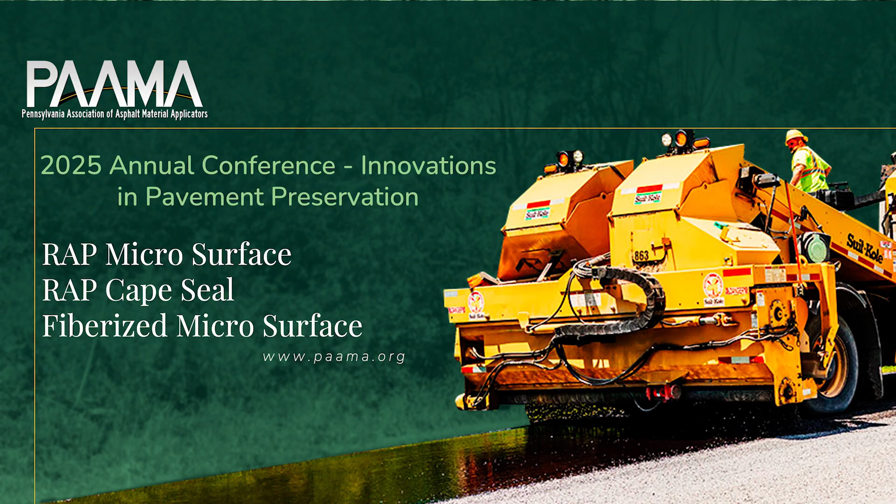I'd like to thank everybody for giving me the opportunity to come in and talk about some pavement preservation, RAP microsurfacing, and Cape Seals. I do think this is new to the industry, and I think we need to start looking at sustainability and ways that we can utilize RAP in pavement preservation, stretching those limits with RAP.

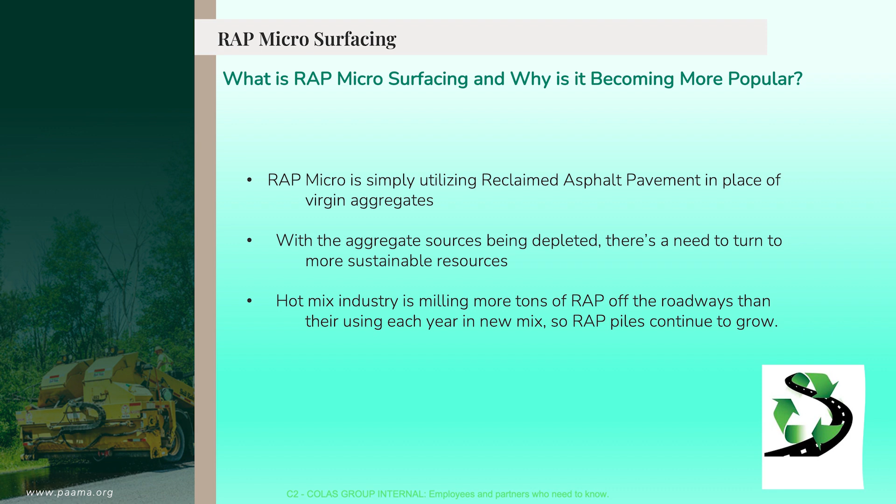So what is RAP microsurfacing and why is it becoming more popular? It's utilizing reclaimed asphalt pavement in our microsurfacing over virgin aggregates. Over time our virgin aggregate sources are going to start being depleted. But what's happening with our RAP piles throughout our states? Every state, the RAP piles are growing and growing. So let's start looking at how we can use this RAP in our pavement preservation techniques.

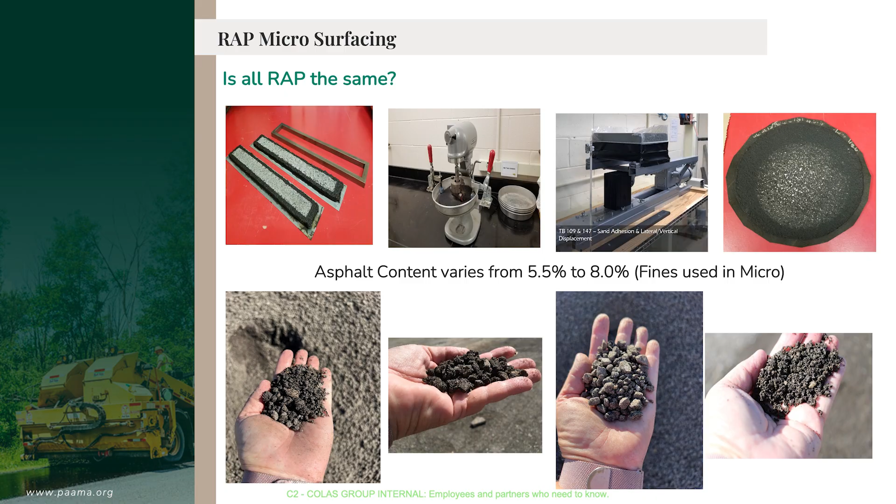So is all RAP the same? Raise your hand if you think all RAP is the same. RAP is just like mix designs, right? We have different gradations, different high quality and low quality aggregates within our mixed designs. That's the same way with all the RAP. But we're not doing RAP management at this point, so we have to be careful. We need to look at all the different sources we've got, and we have to treat them basically as a low quality aggregate right now.

We also know that it can vary anywhere - the fines are going to have the higher AC content, while the larger particles that you use for chip seals are going to have the lower AC content within those piles. You can also check your RAP to make sure if it's polish resistant aggregate.

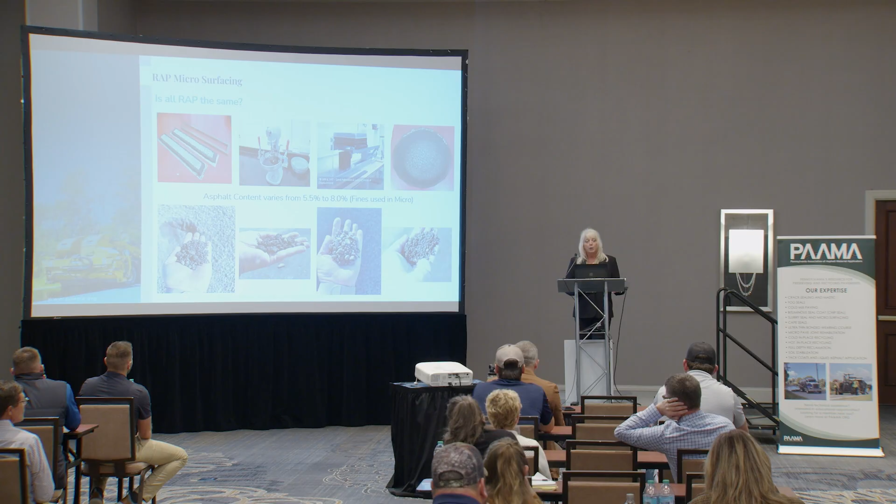I'm going to get into some of the deep dive that I was doing when I was with KYTC. I'll go back and forth because I worked directly with Strauser Construction when I worked with the Kentucky Department of Transportation. They did a lot of the research with us when we were working on our RAP projects.

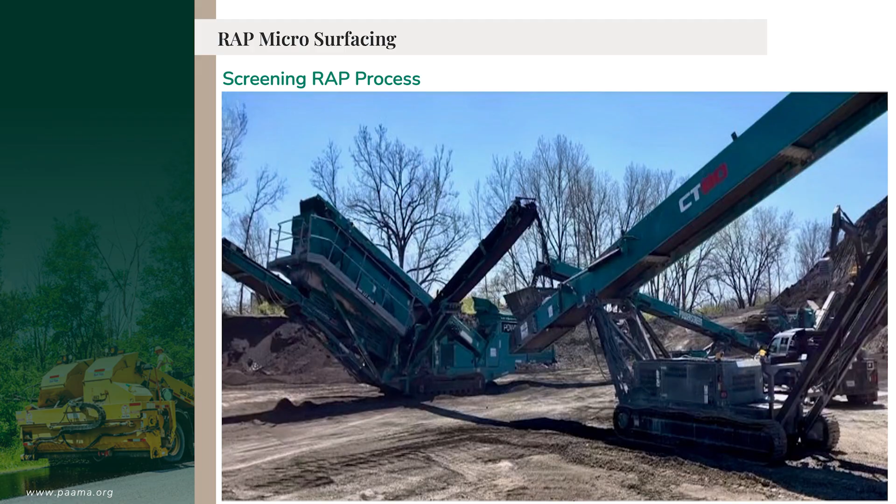So how do we process RAP? There are two different ways you can do it. You can start out with screening RAP only, just doing a straight screening. You're going to process more, but you're going to have more oversized aggregates. You're going to have waste of anywhere between 10 to 15%, maybe even more, depending if you've got saw cut type, like base failure, blowout type material in your RAP piles. So just doing the screening is going to give you your chip seal aggregate and then your fines.

And then your oversize is going to be kicked off. You're going to process more, but at the end you're going to have less material to work with because it's kicking your oversize off. So you can also go to crushing and screening that material.

So when you're crushing and screening, what's happening is you're screening it first. All that oversize is going into the crusher. So then it'll fall through the screens and the appropriate screens, and if it is still oversized, it'll go back to the crusher until you can utilize 100% of that material.

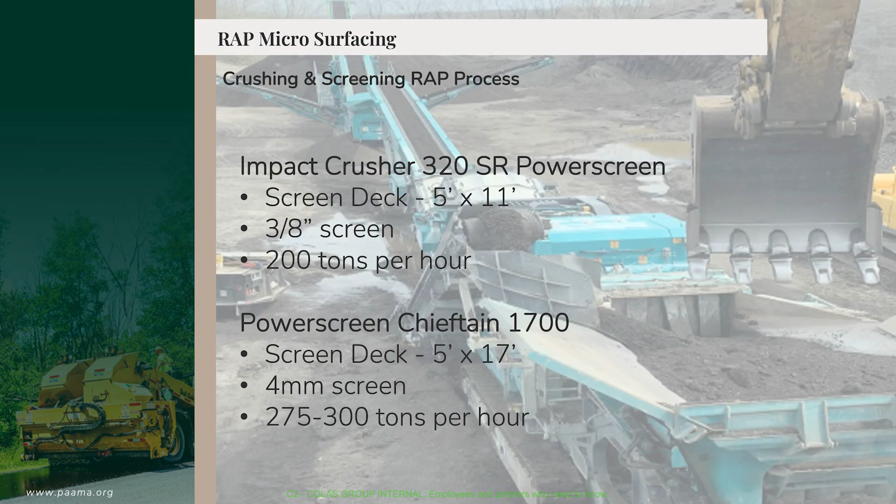So when you're utilizing 100% of that material, you're going to end up with about 60 to 65% being your fines, and 35 to 40% being your chip seal aggregate. So that just tells you what you're going to end up with.

This just shows you the different types of crushers you can use, and the screen sizes. This might be something you want to look at, because I'm going to tell you, when I was working with the DOT and we first started working with RAP, I thought, no problem, the processing is going to be 100% the easiest part.

Well, let me tell you, that was the hardest part, because we had a company come in that had actually been crushing rock. It's a totally different process, and I'll dive a little bit deeper into that about some collaboration and what we did.

So if you're an agency wanting to use RAP and having a company do it, make sure it's a company that knows how to process RAP, or you're going to face some really big challenges. I did so many gradations, it just wore me out. So that's something to be mindful of.

So this is kind of where we get into 100% RAP and the challenges that come with using 100% RAP versus blends. With 100% RAP, you're going to have some complications that come with that.

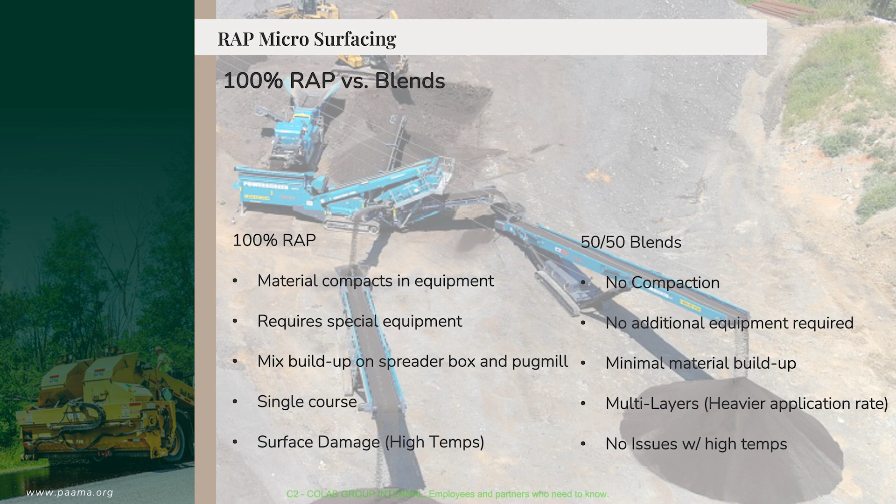Using 100% RAP, you're going to have material that wants to compact inside the beds of your trucks. So without making modifications to that equipment, you're going to need shakers or vibrators within those beds to make sure agglomeration doesn't happen, so you're able to get that material out into your microsurfacing machine.

It also can end up with buildup in the spreader box and the pug mill. You can get more drags and buildup on the rubbers more frequently, so it's going to require a little more maintenance. I think it becomes more challenging.

Once again, you have to be a little more careful for wheel rutting. If you've got wheel rutting, you can have problems with this material, ending up with more surface damage. I've seen projects that are 100% and maybe they're tender a little bit longer, because you're using 100%. With a 50-50 blend, you eliminate a lot of those problems.

So you'll use 50% of your RAP with 50% virgin aggregate. You get rid of the compaction problem. You don't need additional modifications to your equipment, because it will not agglomerate like it would if you were using 100% RAP. You minimize your material buildup.

You can use multiple layers. A lot of people doing 100% RAP are doing it in a single course with thinner lifts. So you can up your poundage, do it in multiple layers, and you don't have those high temperature issues when using this material.

So I really do like using the 50-50 blend, especially working in Kentucky trying to save dollars. There's some other stuff I'll get into, diving a little deeper into using RAP, the industry challenges that Kentucky faces. So I have to be very careful and vigilant about what I was doing.

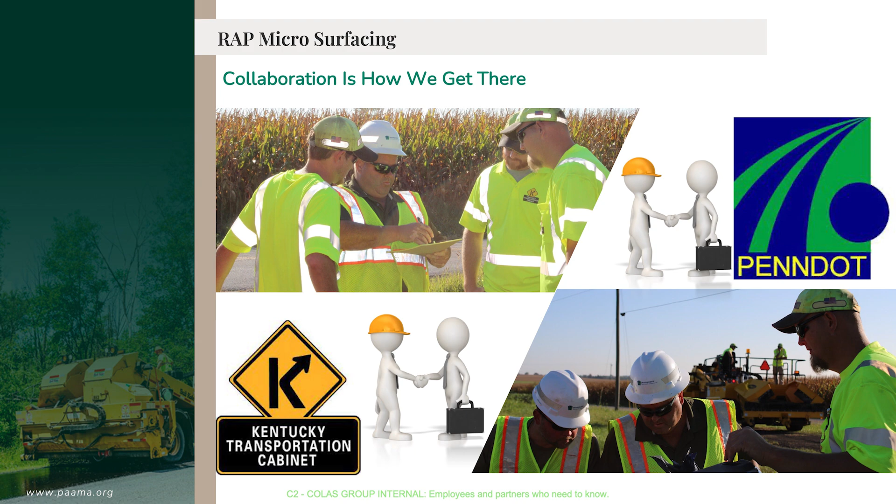And I wanted to thank Andy—I know he's not here now. I wanted to thank Steve, and I also wanted to thank Pennsylvania DOT for allowing this collaboration to even happen. I think that's more of what we need in industry, and agencies sharing and collaborating together so that we can grow this industry better and stronger in the future.

So when I was in Pennsylvania, what I did was I took a sample of their chip aggregate from where they had their RAP process and their microsurfacing aggregate. I took it back to Kentucky. And he's like, well, what are you doing that for? I said, I need a baseline, right? I need to be able to know the material.

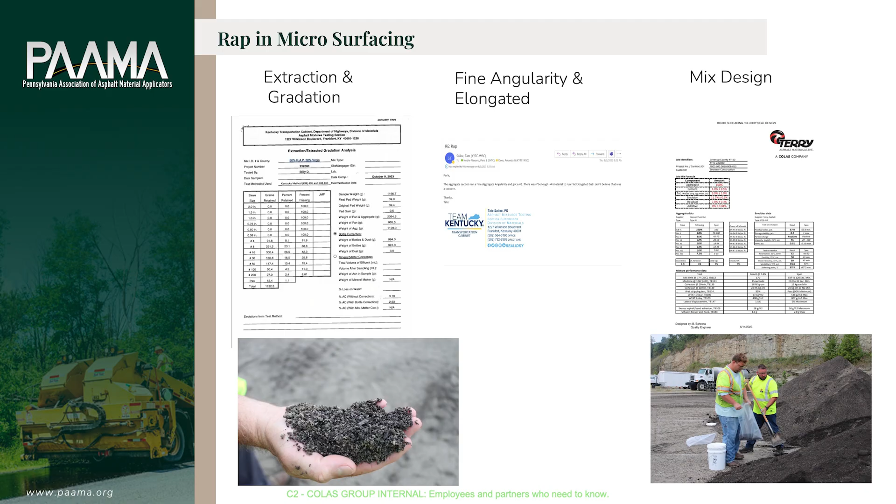So I wanted to check the fines that they have in RAP, because I have found in RAP with chip seal, you can go up to 4% fines and not have a problem. But I also wanted to look at the microsurfacing sand to see if it met our gradations, look at the extraction to see what the AC content was of that material. So this is just some of the testing that was done on their material, and then when we processed our RAP, we did the same materials.

So this information was split between these agencies. The test that we did on their material was shared with them, then the materials that we did on our own was shared back with them. Now when we did process or check the gradation of the fine aggregate for microsurfacing in the RAP, it fell out of spec in one of the sieves. But when we blended a 50-50 blend, we were inside the spec for gradation on that.

So this is the first project that was done on the double-A highway. It had about 3,400 ADT on this particular route. So the picture to the far right would be day one of when they were done. These were both done—so we always had a control section. This was a double microsurfacing. We had 18 pounds on the bottom course with a type 3 aggregate. The surface course was a type 2, and half of the job was split.

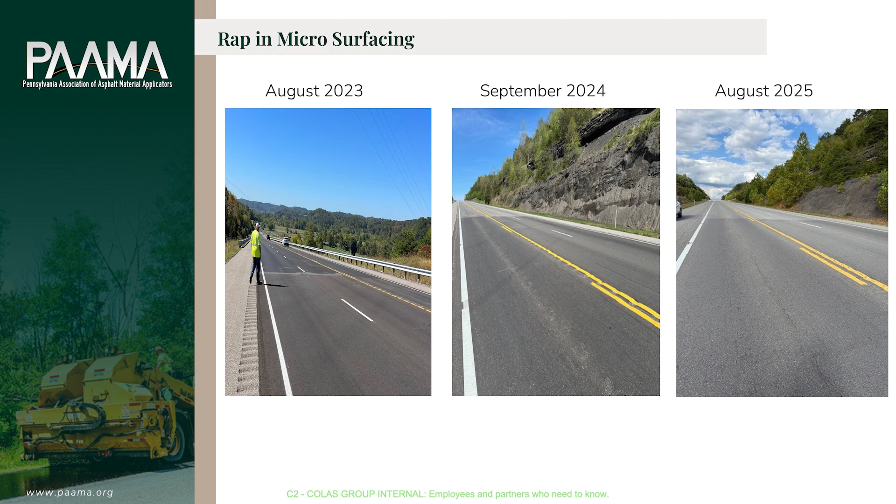So we had a control section that was standard micro, and the last 2 miles was the RAP. So we wanted to be able to compare friction values, wear, all kinds of things. So it was a control section.

This was a year later, and as you can see, it almost looks like a pavement joint—more aesthetically pleasing to the eye, a lot better for visibility of your striping, so the appearance is really good. This was just taken a couple months ago, so we're at year 2 at this point on the project.

Interesting thing about this was I also wanted to look at friction values, because I figured the friction values could be a little bit lower, right, because we're using RAP. So with the first year that we'd done this project, probably about 3 months afterwards, we ran a lock wheel test of friction values, and we had about 9 points difference the first year. A year later, we were only 2 points difference, which was impressive to me.

It's like only 2 points difference between the RAP and the standard. So it's showing that it's performing very well.

One of the questions I've had about it is, do you see more cracking because you're using RAP? No, the cracking is the same between the RAP and the standard micro. I'm not seeing a big difference.

They're continuing to monitor this. They have run it, but the numbers have not come out yet. So at this point, because I don't work for the agency, they're going to give me those numbers verbally. They'll never send them to me in an email, obviously. And once again, this is taboo information that me and Andy shared.

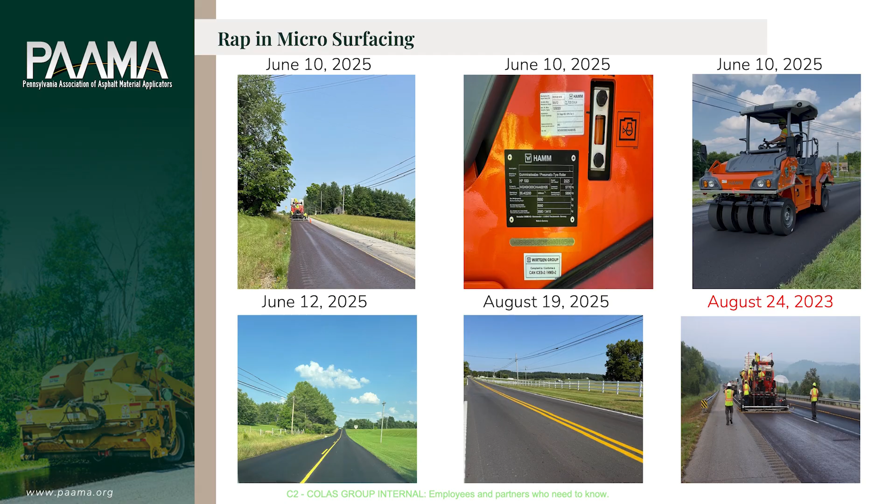So therefore, if I can open new faces and gain those values back, then maybe we only have to bring in 50% virgin, high-quality aggregate into the state and be able to process our RAP and utilize that and save dollars.

The other process of doing this was I wanted to see if I could put the RAP on the bottom course, because if I don't gain those friction values back, if I have something that requires a polish-resistant aggregate, I can always use that RAP on the bottom course, which is still saving us dollars, right?

So we put it on the bottom, and on the first project we did, I noticed that it tends to hold water, right? There's a lot of water that wants to come out of this material, so you've got to extract that because I didn't want to trap water or end up possibly floating emulsion by having too much water still in this material.

So I had decided when we set this — this is before I left KYTC and went to work for Strasser, I had written the specs for this — we added the pneumatic roller to help push that water out of that mat across the entire width of that roadway. That allowed us to go over top of that the next day.

Now, once again, this was RAP on the leveling course. Then we went to the surface course, then we split the project in half again: standard micro for part of the project, RAP micro on the other half of the project. This is to be able to determine what the values are.

This is the same ADT level as the road that had been done 2 years prior. So we're looking at it from that standpoint. We did use a polish-resistant aggregate blended with a lower quality, which is a D aggregate in Kentucky. We blended that at 50-50.

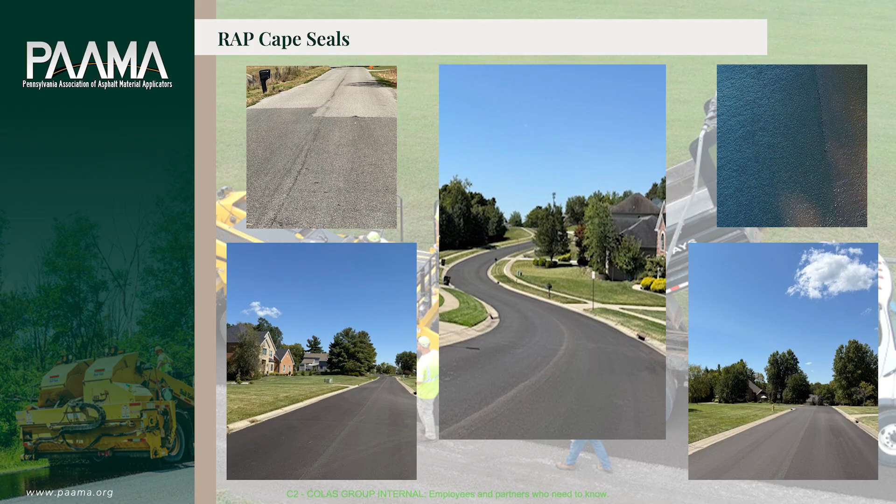I said, have you ever thought about doing RAP chip seal? Well, obviously, they didn't even know what RAP was. So I met with their trustees. I said, listen, you have zero dust because there's no dust in it. You have better retention because it's coated in binder already. So you're eliminating a lot of the problems that you're already talking about. So they were going to have to go to a mill and fill, or they had to do a Cape. So they trusted me. We did a RAP chip seal.

2 days later, we're microing over top of this. So we placed it June the 14th. This picture was taken September the 8th. So you can see it's performing very well. You don't see any bleeding. We don't have any issues. This agency is back to using Cape seals. They were going to take Cape seals completely out of their preservation treatment. Now they're back in business with doing that because they can't afford to do mill and fills. So this gave them an opportunity to use RAP and combination treatments.

So let's think about what other options we have out there. Think outside the box and be creative, because there's ways to use this material, and it's a commodity we can use. And I wanted to share this picture right here. I was talking about Andy coming down and us doing RAP chip seals, so I just wanted to show you the difference. I wish I had taken a picture of when we did the RAP chip seal that Strasser did. This is actually State Forces right here, first time they'd ever chip sealed in their life. And this is the RAP, and they ran out of RAP, so they finished the road using just regular crushed limestone. So being able to see that a little bit, you can see that bleeding.

So I'm a believer in pavement preservation. I'm a believer in using RAP, and I think it's a commodity we need to use in the future. So I'm going to play a short video here, and me and Mike are going to change places, and then we'll do questions at the end. Mike?

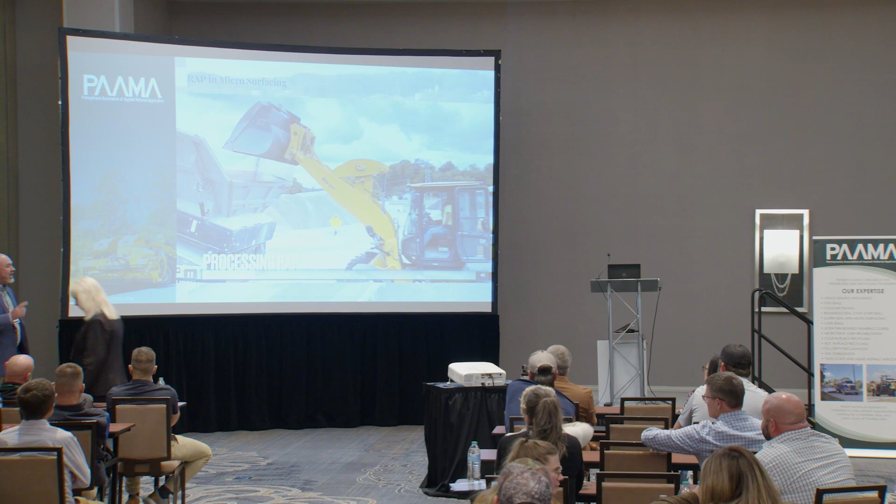So this video was actually taken in City of Lancaster, which is the very first agency in Ohio that did this project. It was part of a research with Ohio University and ODOT in order to get this going. So they just screened the material, and essentially they got the size 57 aggregate that they used to bed pipe with. They got the chip seal aggregate, and they got the micro sand. Everything else that was larger, they just pushed off into another pile.

So here you can see the RAP chip. They did this in-house with their own forces, and then we came in with our crew and actually put the micro down on top of it.

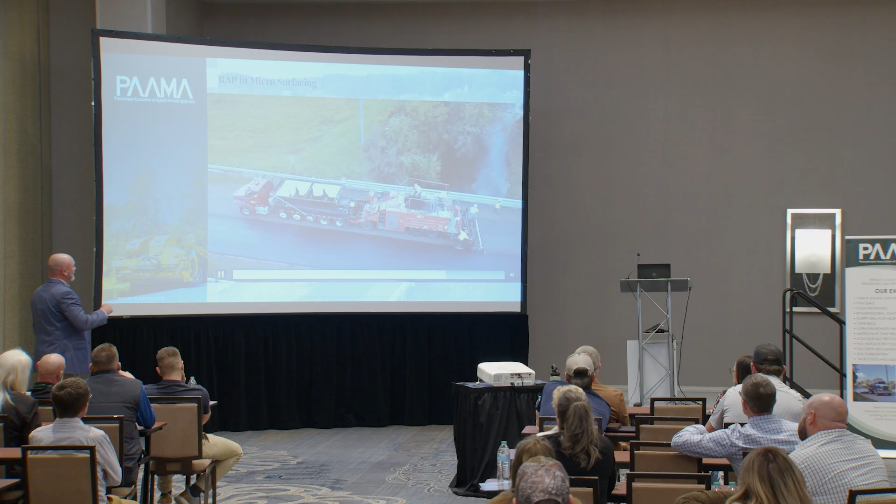You can see tons of commercial traffic, it's still in great shape, and because they're screening it themselves, they wanted it a little bit finer. Wish I would have brought the picture to put it directly in the presentation, but it is very, very smooth because they went a little bit finer with the gradation.

You gotta excuse the mess, this crew was actually mostly office personnel, but one guy on the crew who was actually the president of our company, so it's not something we do every day. When customers call, you gotta get the work done, right?

All right, so I'm not a great presenter, not nearly as good as Zach or Paris, so got to bear with me here.

Okay, so Rex called me and said, hey, will you come talk about fibers and micro? And my mind instantly went to a project that we did in 2019 with FORTA. And like Paris was saying, we have to listen to our residents. Dust for chip, micro. What's the most common complaint about micro?

It cracks. That's exactly right. So we worked with FORTA and their fibers to work on a solution to the cracking pavement. That was a softer binder micro. We blended a softer pen liquid with your standard traditional micro liquid to get a softer material.

I'm going to show you some of the testing here first in videos. So this is a test we did in the lab before we ever went out to the field. Basically what we did is we took these molds, glued the micro down, and did tension tests. You can see how rigid that micro is. It actually broke the glue before it bent the metal.

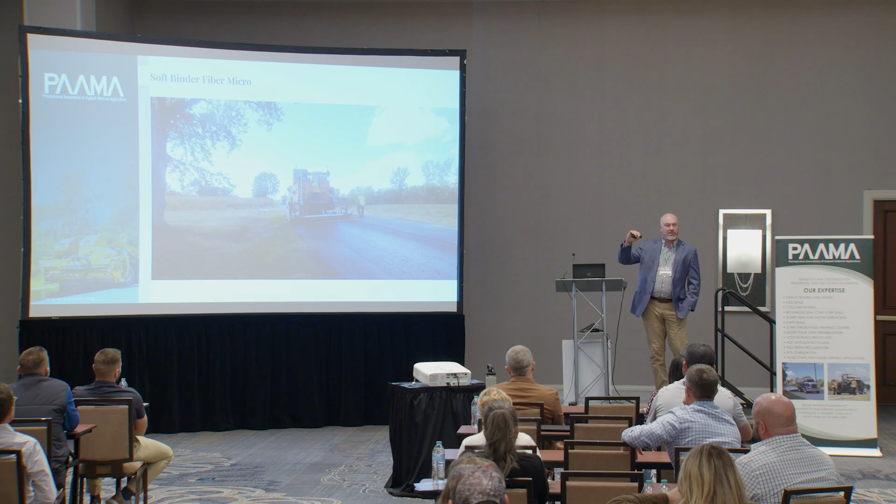This is about 6 months after the job was completed. Looks fantastic.

Part of this program, we wanted to make sure we researched it, so we actually went out and crack mapped. We paid a third party to go out and crack map it for us. They did 100-foot sections, so this is the cracking beforehand. This is that same exact area 1 year later, and this is 2 years later.

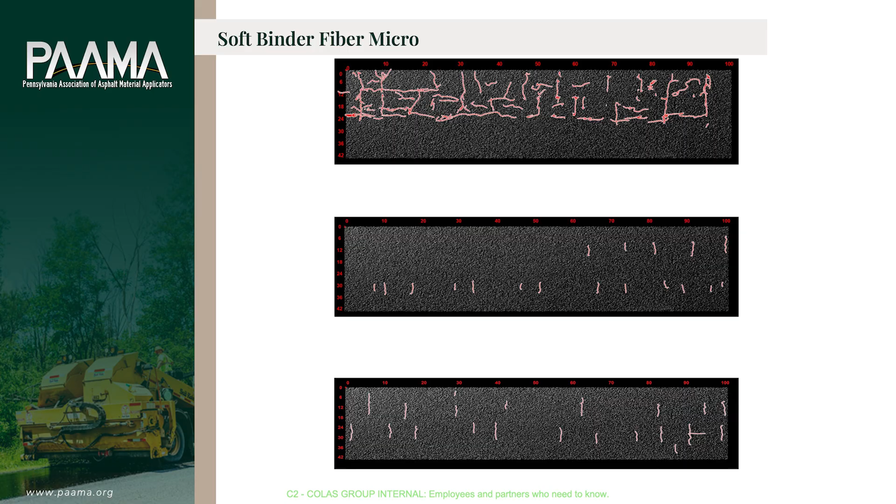Once again, we didn't stop all the cracks. Zach usually says, what's your famous quote? If I can stop cracks, I'd be in a different tax bracket, that's right. So the whole goal here is to minimize and delay the reflective cracking.

This is that road. Notice the barns in the back. 2019, this is before we did the project. 2021, notice the barns in the back. We do have a couple of those big working cracks coming back through.

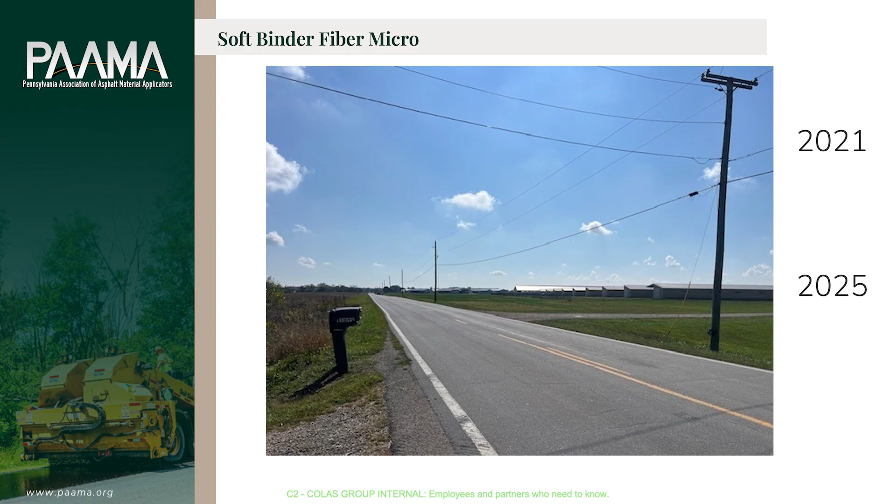And then this is 2025. I actually missed the mark, I wasn't as close as what I should have been. You can definitely see there's some cracking coming back in this pavement, but it's significantly better than what it was. Our whole goal with using those fibers is, once again, to minimize and delay the reflective cracking and reduce the plow damage.

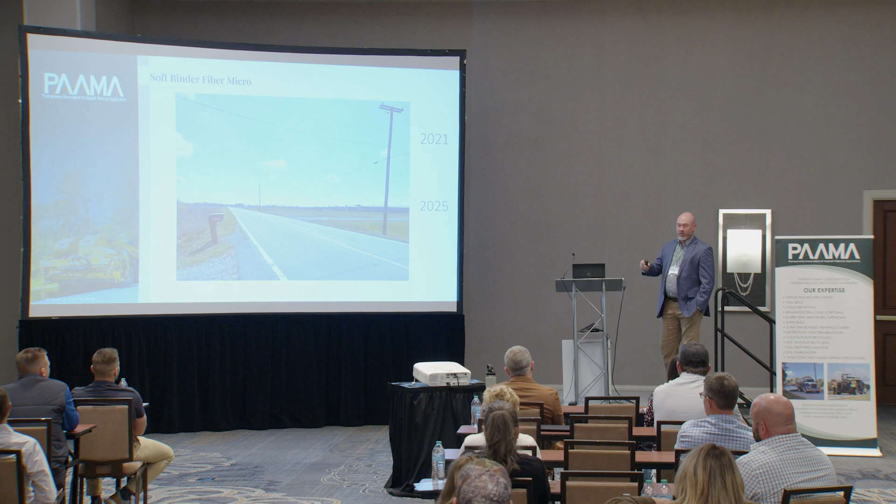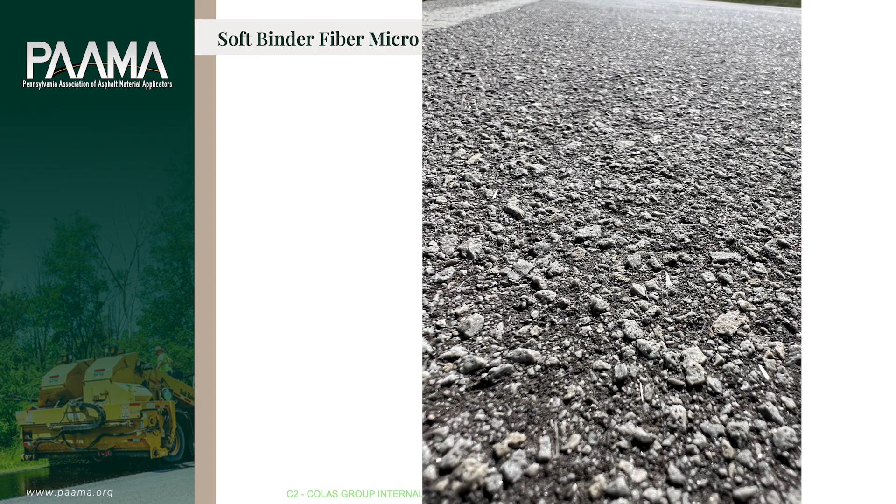Any questions about this? Go ahead. Yeah, how long is the fiber? The fibers are only about a quarter inch long. I was actually going to bring some samples, but shameless plug for Forta, they have baggies at their booth, so go see them and check out their fibers.

Do you think it's because of the soft pen, the advantage of the cracking that comes through, or is it the fiber? You couldn't do the soft pen without the fibers. Essentially, you're going to have significant running issues, and the aggregate would not stay suspended in the emulsion, it would actually sink to the bottom and you'd have major issues. So the fiber is allowing you to combine those two.

Was this a RAP job too? No, this was not a RAP job. This was done in 2021, which is several years before we started getting into RAP.

Haven't checked the compatibility with that. Forta may know, you guys know? Compatibility with the RAP and the fibers, it probably wouldn't make a difference. I haven't seen that yet. Yeah, definitely not a lab guy, I'm kind of a jack of all trades, master of none, so.

Last slide here, this is actually MnROADS data that you can get online. So what they did is they took two different sections. The grey is your standard control, it's a standard micro, and then the blue is a standard micro but it actually has the fibers in it.

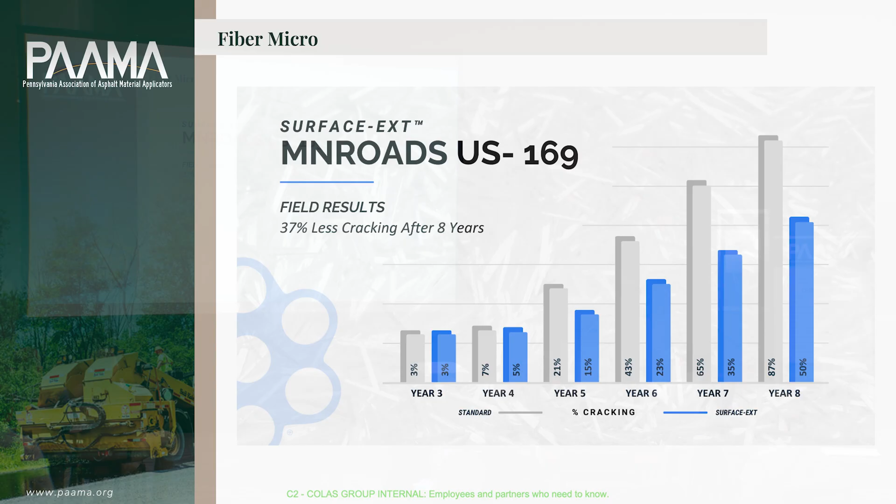This was a great case study because yes, we had great success with the soft binder fibers, but this is showing over time those fibers are really helping reduce and minimize the cracking, 37% less cracking by using the fibers. And once again, we see great success reducing plow damage as well.

What was that, no, that is not soft base, that is standard micro. These are both standard micro in MnROADS, the study that they did. And I think that's really all I got, I just wanted to make sure that I showed this.

Kentucky has 2 big projects this year. Ohio's doing a bunch of just standard, and it really doesn't raise the cost that much to add the fibers into the mix, and the results are well worth it.

Rex actually did a great presentation out at the Midwest Pavement Preservation, and he asked the question, is it just black rock, or are you getting a benefit? With traditional hot mix asphalt, when you're mixing and making that hot mix, you're reheating the aggregate, so you're getting benefit from the liquid that's on the stone. In this process, it's ambient temperature, you are not gaining anything, you're not changing the polish or the numbers of that material itself.

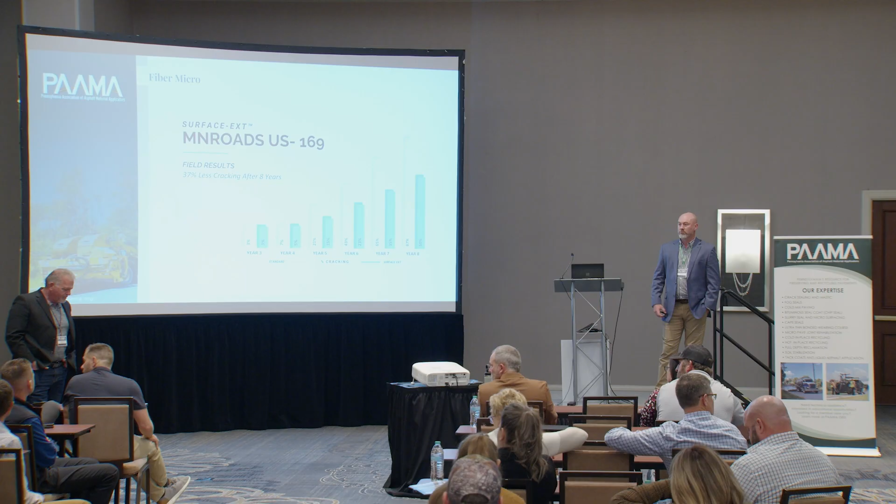That was one thing I had learned from New Mexico - collaboration is big. So don't be afraid to collaborate with other agencies or contractors, whoever you need, to be able to grow the process within your own network.